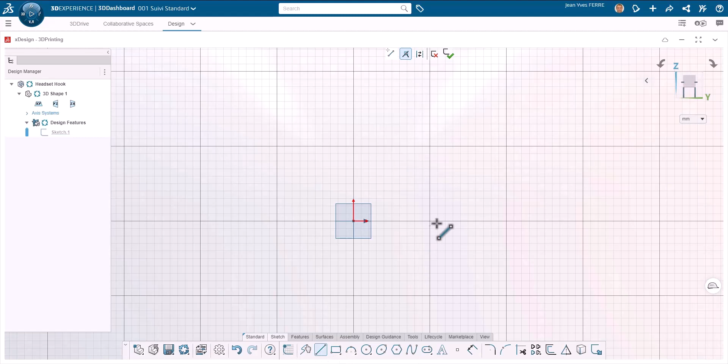I draw a line and see how I can turn the next line into an arc just by going back on the extremity point. Then I release the mouse button when I see two dashed lines, so I'm sure the arc is at 90 degrees. With mouse gestures, long click on the right mouse button and moving the mouse, I see a configurable wheel

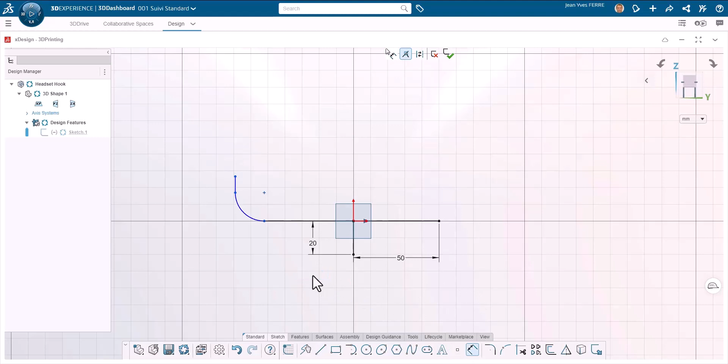where I choose dimension. I center the line with this dimension and see how the sketch fully scales to the first dimension. This is particularly interesting when there are arcs in your sketch, so everything stays in place correctly. Other dimensions are added with the same simple tool, no need to search and change dimension tool for each sketch entity. This saves many clicks.

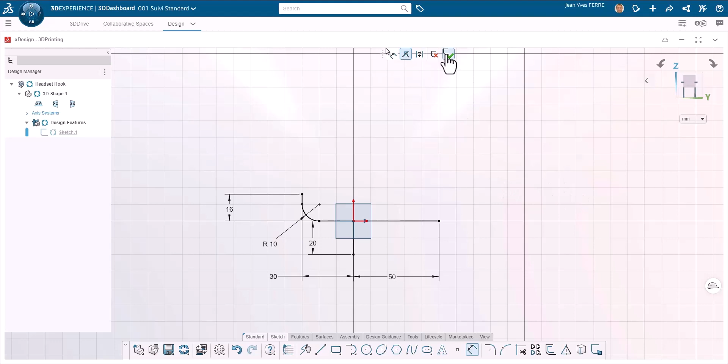Once the sketch is finished, I make an extruded solid, and of course xDesign tells me there is no closed contour. That's not a problem because I wanted to show how to make thin extrudes with only lines. As you can see, xDesign adds material on the side you want, or both, and adding a thickness on top of the extrusion depth is enough to get the solid body of our hook.

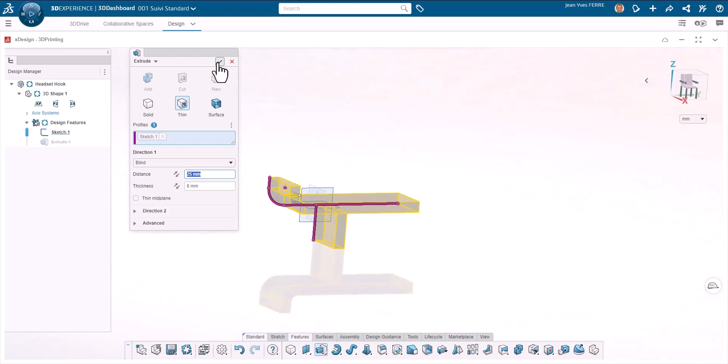I hide reference planes for more clarity and I continue my design. First, I would like to round this extremity. I don't want my headset to be damaged by sharp edges. For that matter, I use a specific fillet option called full round fillet that creates a rounded shape tangent to other faces that adapts to thickness without adding any value.

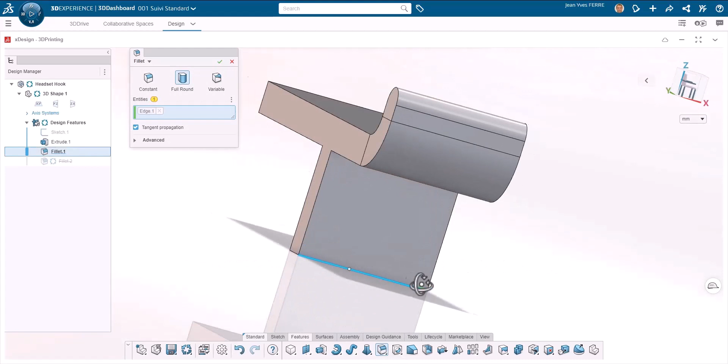So if I change thickness, the full round fillet will adapt automatically with no rebuild error. I do the same for the lower shape and again no value to enter because it adapts to the surrounding geometry.

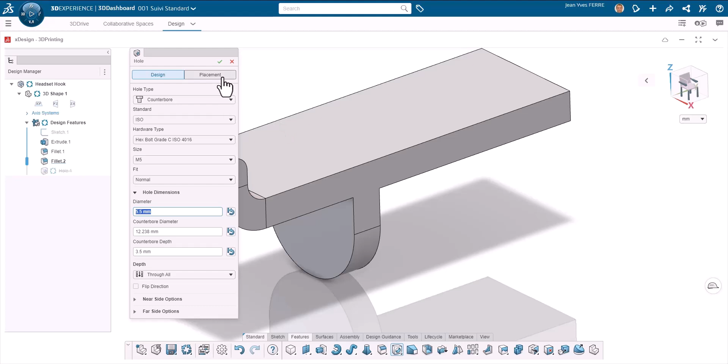To fix my headset hook I need screws, so I will create holes directly in the part for counterbore screws. I don't want to spend time measuring my standard screws, so I use the hole wizard that includes thousands of standard machine parts, including my M5 screws. I will only need entities to define hole centers.

And as I don't have an existing geometry for my hole centers, I will use a very nice xDesign capability to create a sketch inside a feature without discarding the feature. Very convenient when you spend time entering complex parameters, for example for these holes. Here I created a dashed line centered on the side edge.

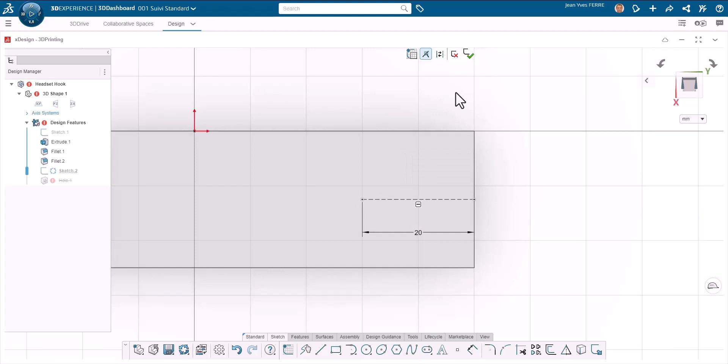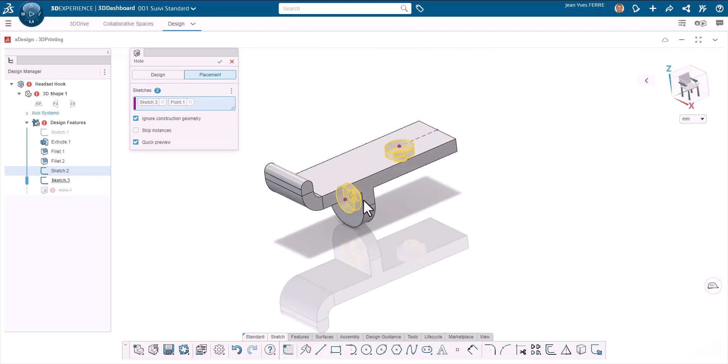I can create as many sketches as I need, so I create one for the lower shape. To get the center of a circular edge, remember to hover on the edge until the center appears. This will add a concentric relationship automatically. For the top face, I don't need the full sketch line, just one extremity, so I play with selections. Once all settings are okay, I can create my standard holes.

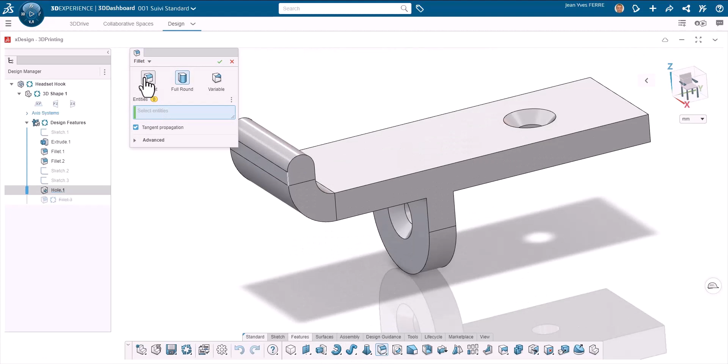To finish, I will add new fillets, again to avoid sharp edges that could damage my headset. See how this bubble here proposes the most logical other edge for the fillet. And I finish with the lower shape. All these time savers are key to design quickly, even when you don't design every day.

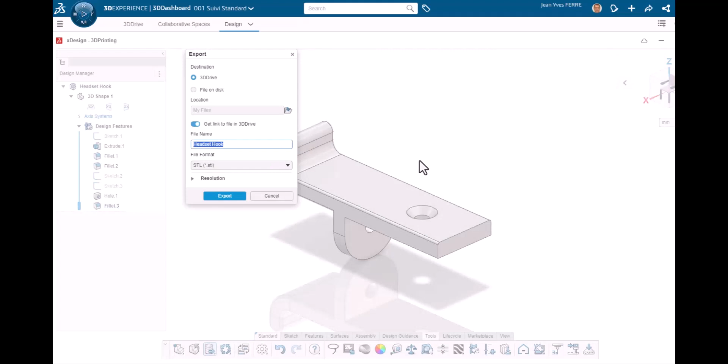The part is finished. Now let's prepare 3D printing with features included in xDesign to orient the part. Here on the side to increase strength. I save as an STL file ready for the 3D printer slicer, where I set 3D printer parameters and send the file to the 3D printer. This is the most common process.

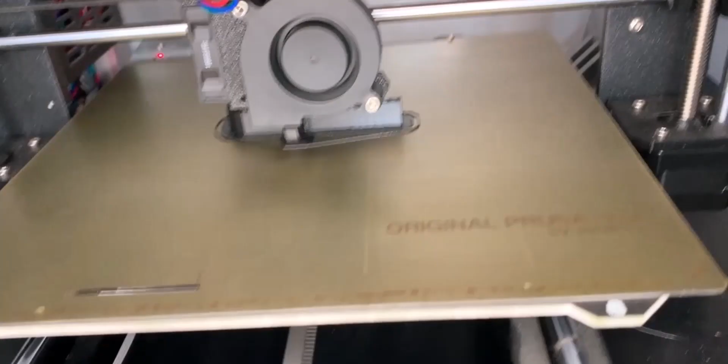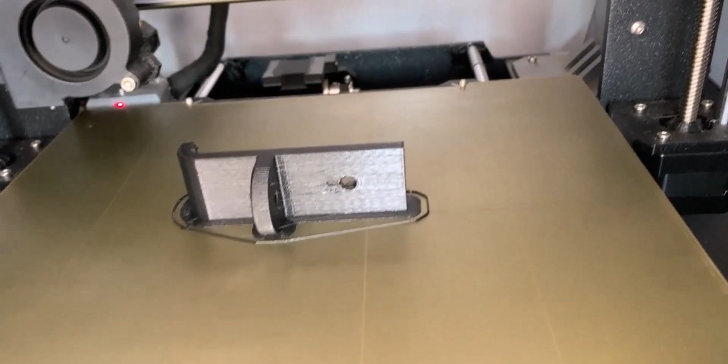Now it's printing time. Always nice to see the 3D printing process sped up. To finish, I fix the hook with two M5 countersunk screws and I can use it right away. Okay, I should have made pilot holes, silly of me. My headset can now be stored securely.